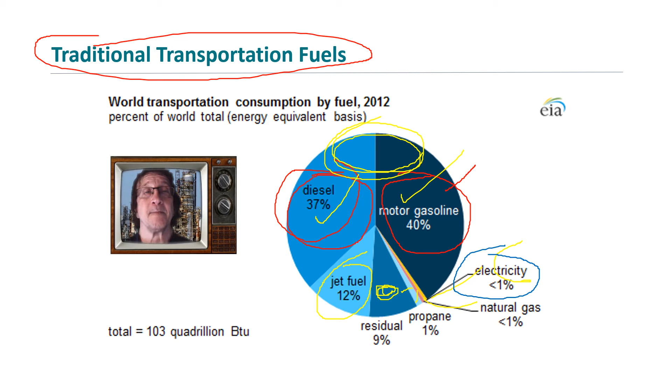Now, when we look at alternative transportation fuels, this is something we're going to see is probably going to be the best thing we can do to wean ourselves off of fossil fuels, is to look at more renewable types of fuels that we can make. The problem is there's going to be a consequence to that.

Right now, the most popular one is ethanol, because we could mix it with petroleum to dilute the petroleum and reduce that usage, so at least we don't deplete petroleum as fast as we do. We can make ethanol from a variety of plant sources and waste sources, but the thing is that then that competes with other sources for those plants and materials. Ethanol could be used in a lot of ways, for electrical production, again, to running vehicles.

We look at electricity as an alternate to petroleum, but again, this is going to be a small market, and this electricity can be solar, so we can make solar cars. But there's of course a downside to that, like any solar, in that you'd have to find a way to collect all this charge during the day and then produce enough power to move big vehicles, but also be able to have a reserve battery to run at night or when there's not enough sunlight.

Hydrogen, the problem is we don't find hydrogen naturally. It is a byproduct of certain industrial processes. We can make it, but it involves energy in itself, so there's an efficiency loss. And we can produce hydrogen-powered vehicles.

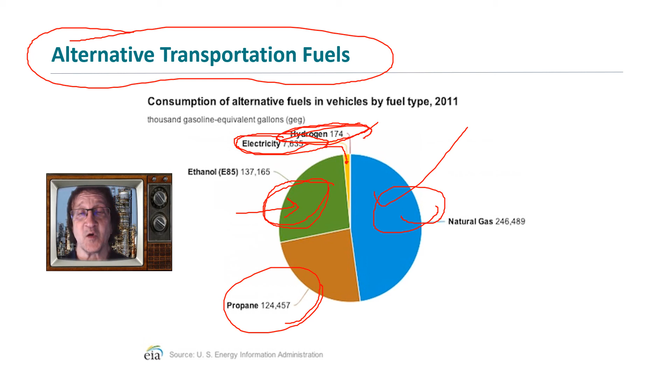for consumer purposes. But the problem is you have to have the raw materials and be able to make them at a rate faster than we use them, or else it wouldn't be considered a renewable. If we can't make it fast enough, it becomes non-renewable or difficult to renew, which makes it limited, meaning we have to conserve it, or it just gets very expensive.

So we look at the data for transportation, because this is a major energy glut, meaning a fossil fuel glut and other resource glut. It also uses a lot of resources in general, minerals and petroleum for plastics and other things.

But about 25% of our energy consumption in the United States goes towards transportation. This is not true of other countries that are still at earlier stages, like you learn in the Hans Rosling video, of foot or car, bicycle or animal transportation, or using small motorbikes. So we are big users, particularly of large vehicles and commercial transportation.

And 90% of this transportation uses petroleum, because, I hate to say this, but the cars outnumber the trucks. We use small trucks and cars very frequently.

What's really sad about this is that we still work in a mode in the United States like petrol is going to be there forever, and we don't look enough at cars that are very energy efficient. I mean it's much better than when I was a kid, a car would get horrible gas mileage compared to today. So we are looking at some options, but mostly we still treat petrol like it's always going to be there.

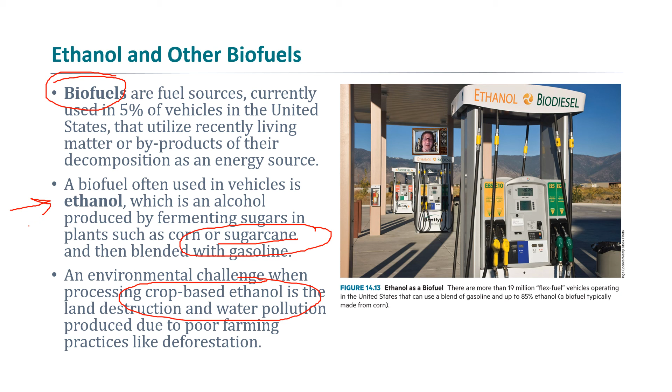And again, guys, we're still burning something. Remember, particularly for a test, we're still producing CO2, but these materials are cleaner and more controlled. That is a problem too, because crude oil naturally has additives in it that we design our engines for. So we have to redesign engines somewhat, and it does affect the powertrain in general and the output of the engines.

I am not a fan of electric cars. When I look at solar houses and other things like that, yes, but with a little hesitation. The electric car is not going to be the future for a while, and a lot of it is the power they can produce, regardless of what Tesla produces. There's still going to be some efficiency problems.

We're not talking about cars that can carry a big load yet, or trucks that can produce a lot of torque yet. This is being worked on, but the limitation is the batteries, and these batteries get costly and huge. When we look at a gas car, the battery is very tiny, but look at these electric cars, and most of the weight is the battery, and these batteries are toxic.

And they're difficult to recycle. In this country it's almost impossible to recycle them because they're considered hazardous waste. So we ship them to other countries with less strict environmental policies, and it pollutes those people. But it's cheaper to send them on a ship, let people, including kids, recycle the compounds in these batteries, and family-owned companies collect the materials and send them back to the United States where we rebuild these batteries. So the batteries have to be rebuilt, discarded and rebuilt, and hopefully somehow recycled without producing a toxic environment.

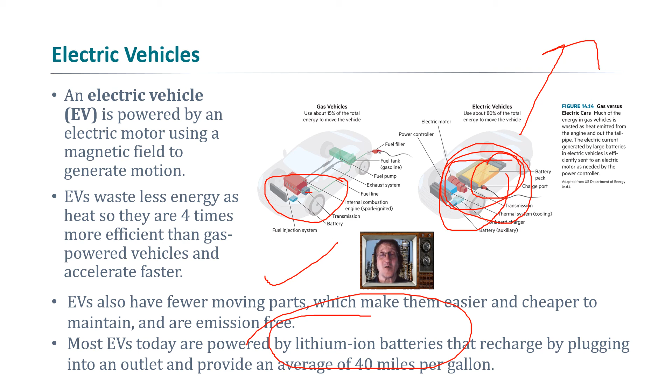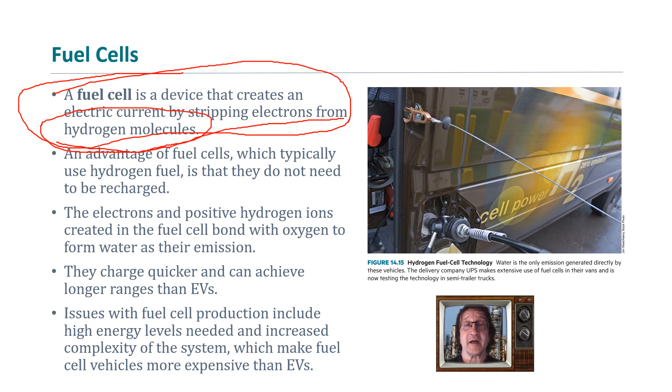Okay, fuel cells are a unique type of battery, in a way, or engine, if you want to look at it that way. These are based on hydrogen power. Like I told you, I met the guy that helped develop this technology. He was an engineer and also had his own consulting company doing this type of stuff.

These require a fuel, but it's a fuel you can make from water and other materials. What happens is the hydrogen is forced to bond with oxygen, and it creates water. So these buses produce steam. I've seen a couple of them in Germany and also in California, and they produce steam.

The problem is you have to have hydrogen refill centers, and hydrogen is a gas that has to be compressed, and it can become dangerous. It's also very explosive. I mean, the Hindenburg blimp dirigible was filled with hydrogen, and when it had a little spark, it exploded like crazy.

And we talk about also hydrogen can be used to make bombs. So hydrogen could be expensive to make, not safe to store and transport. Now on a bus, you're just filling up a tank, and it's probably no more deadly than gasoline in a tank, but it is more flammable, and we've got to be careful with this.

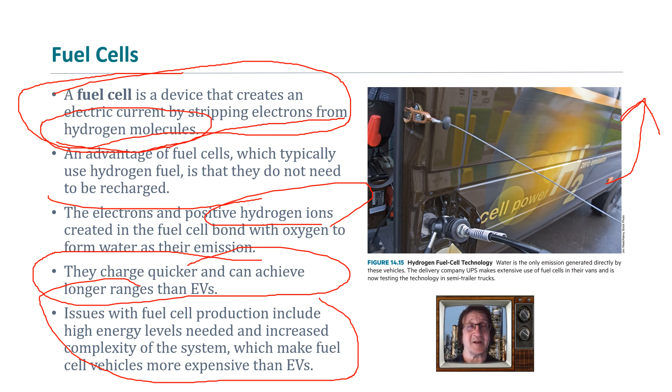But these produce water as a waste. The problem is now you have to recycle the water and use electricity to cook that water to make the stuff again. So you're getting an efficiency loss every time you recycle the water from a hydrogen bus, because you're losing energy and losing water in the process too. It's not 100% conversion. There's going to be some loss.

So guys, there are other alternatives to transportation technology. You can burn chicken poop, you can burn potato waste. There's all sorts of things you can put into cars as long as the engine can process it. We had wood burning cars at one time and steam cars that you could burn anything, including a darn mummy if you want to do that. That was actually thought to be done at one time, as people tried it.

So you can burn waste, whatever, as a fuel, but it could be a major polluter. It doesn't reduce carbon dioxide emissions, and it could also burn dirtier. But the thing is that it will wean us off of fossil fuels.

So many countries are looking at alternatives, and much of that is driven by the expense of petrol and diesel, because a lot of countries pay a premium price for their gas, and our gas here is like a quarter to an eighth of what some countries pay, and I've paid a lot for gas. I know, luckily the Bahamas didn't have many places to drive. When I did rent a car, it had like a 4-gallon gas tank that cost me 20-something American dollar equivalents to fill up. It was ridiculous.

So we're looking at, many countries are desperate. We're not there yet because of the cost of their gas. And they tend to build smaller cars. They tend to streamline transportation. They have much better transportation plans than we do at reducing traffic jams, which is the major way that we waste energy and stuff. You'll hear about that a little later.

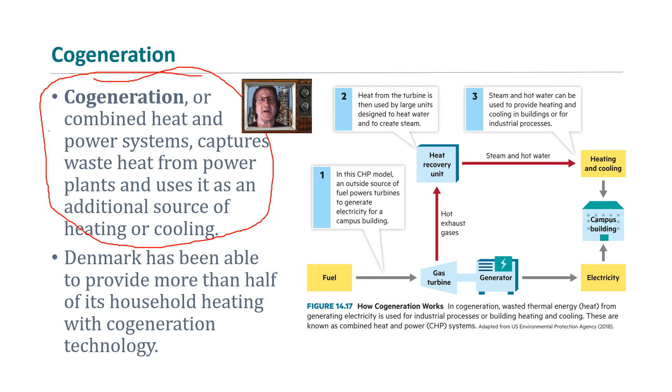And what's bad about it is when we are producing electricity, we are producing heat that is wasted. This is true in many facilities. So what we can do to our machinery overall, including automobiles, is try to trap heat that we produce with the running of power systems. And that even includes a power plant, anything, an office.

And if we can trap that waste heat, we could use it to co-generate electricity. That means use it to supplement power systems, very much like you hear about people with solar cells that pump electricity into the grid. So we could use our houses as ways of co-generating, either through generators themselves or some type of energy efficient device, or using some type of renewable energy to supplement.

This could also be dangerous because people that work on the power lines have to make sure that the circuit is really off, not only from the electrical company, but from any other people that pump electricity into that line. So if you're going to co-generate, you have to have a switch that when the power goes off, your power does not get transmitted through the line. So co-generation is being looked at in lots of ways of supplementing the typical traditional fossil fuel electrical generation.

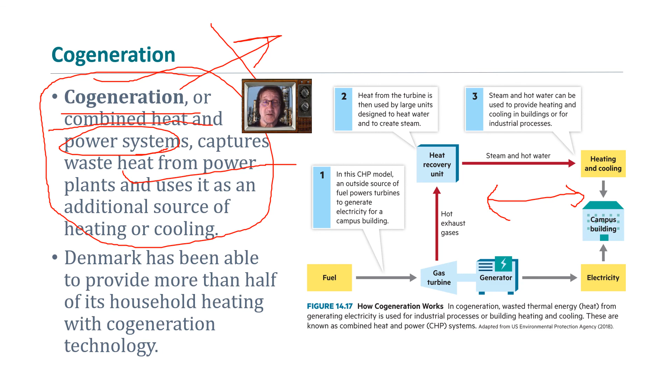Now, an interesting concept when we start using electricity, and this includes electric cars or anything, is we get an energy inefficiency that for some reason we sometimes call vampire power. That means it's power that's secretly sucked off and we never get to use it. It's the power consumed by the devices, lost to friction, lost to heat produced by friction, and other things. So anytime an engine runs, some of the fuel you're pouring into that machine is being lost due to the inefficiency of the machine and due to the effects of gravity and friction on any moving part.

I mean, we can't avoid it except maybe in outer space, but we can't run all our machinery in outer space under very cold environments either. We have to deal with the inefficiency of heat too. So this is a loss we're always going to deal with.

Also, when you have an appliance plugged in, that appliance is sometimes running computer chips, doing other things to keep circuits alive or batteries charged, or just keep circuitry going in general—that in itself gets sucked off. So when you leave devices plugged in, which a lot of companies tell you to do, it keeps the unit charged or running, the electronic devices or computers operating, or keeps the system warmed up, so when you turn it on or use it, it's always ready.

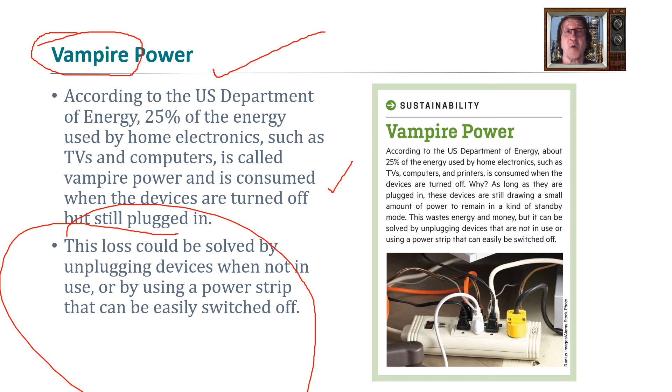Another thing you're going to hear more about in this class, bouncing back to transportation but also useful for electricity, is smart devices. When we use electrical machines, when we drive our cars, we are probably the most inefficient things operating stuff. If we were to allow artificial intelligence to take over machinery, jets, cars, trucks, a lot of jobs particularly in industry and manufacturing, AI could run things more effectively.

You're going to see a video on this going along with this lecture. This is an incredible thing to think about: self-driving cars. Of course these are out now, and we do have self-driving systems in general, some remote control, some autonomous, meaning they don't need a driver or someone sitting in a booth running these things. We find we can get incredible efficiency because we drive like maniacs, not just in Texas, but a lot of places.

So self-driving cars and self-operating machinery is going to be our future because it could streamline processing. And now we're coming out with smart circuitry that can detect when things are not being done efficiently and are wasting energy.

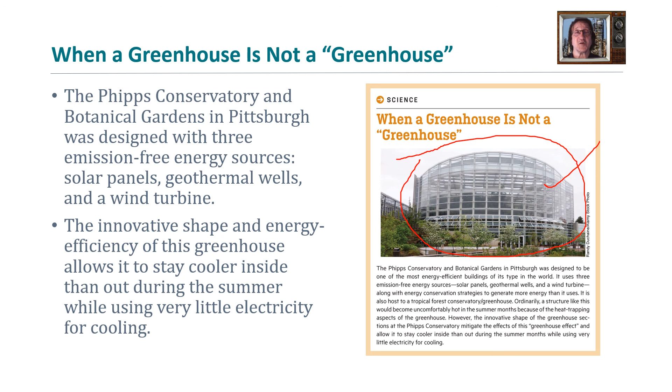So we are finding ways of turning what we call the greenhouse design of a house or building into something that could use the building shape itself to divert sunlight away from it, or help it lose less heat, or allow it to cool when it's warm out. This goes back to ancient technologies used particularly in the Middle East and in tropical countries, where houses were designed to let air flow through and to prevent sunlight from hitting directly or at a bad angle, so it causes temperature fluctuations.

So we could build buildings that are stable, that don't require as much air conditioning to cool, because the building is heating up from outdoor sunlight or from indoor bodies and electricity usage, since a lot of your appliances produce heat. We can make buildings that don't lose heat a lot, or vent the heat and control it. These are all ideas at reducing fossil fuel use, but not really replacing it.

In some areas, you could probably have houses with no air conditioning and heating. I know in New York, we didn't have air conditioning in the buildings. There were hot days—we considered hot like above 80; 70 was really hot, but above 80 was scorching. Yes, it was uncomfortable, but we had flow-through windows that made it a little less tricky. Now, of course, in climates like Houston, that gets unbearable with the prolonged heat. But there are ways of designing things to be a little more energy efficient.

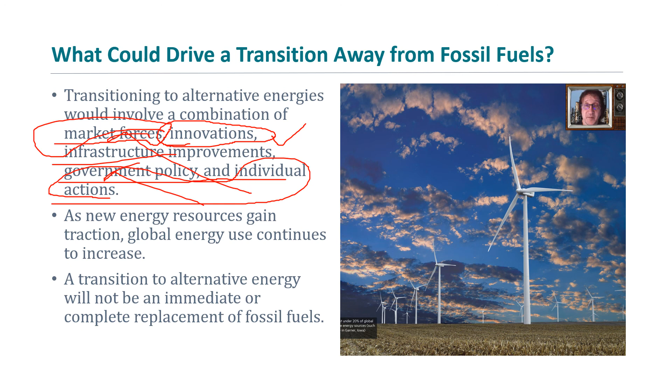We've been on fossil fuels for a long time, using the turbine type system of producing steam or using some type of direct heat to run machineries and to pump electricity. So in the time that I've been alive, I have seen this whole idea of economic forces affecting fossil fuel use for both electricity and transportation.

And we call these boom and bust cycles sometimes. So I've seen gas shortages a couple of times in this country, sometimes in other countries. I've seen the price of gasoline drop and go up incredibly.

At one time in New York in the 70s, I could not afford to fill my parents' company van. It had a 40-gallon gas tank. It was a work truck. We also had a station wagon that had a big gas tank, and we couldn't afford to fill it sometimes.

We also couldn't even get the gas. There were shortages. So we'd have to use public transportation to move small materials back and forth, or else pay somebody to do it, which was probably more than it would have cost for us to do it. So these are natural cycles.

And we see the automobile industry sometimes responds to this by making cars that are more energy efficient or less, so we're used to seeing fluctuations. And I remember watching gas go from 25 cents a gallon to $1, which now we look at $1 as cheap.

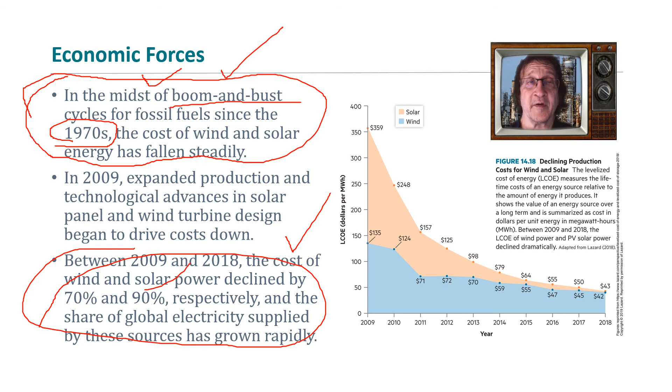And again, this is going to be a boom and bust, meaning we're going to see one group favored over the other over long periods of time. So guys, when we look at generating electricity, this is a problem because we have to be able to not only make electricity, we have to be able to store it and distribute it based on need and usage.

Probably the biggest driving force that's going to permit wind energy and solar energy to produce more than 25% of the energy that we're using now, which is actually pretty good—a few years ago that number wasn't that big—is we really start looking at local approaches to producing electricity rather than regional or national.

So we're going to have to look at more smaller industries that are providing local electricity, which is probably better because New York can't operate the same way as St. Louis, and St. Louis can't operate the way as some small town in Kansas, like Emporia, Kansas.

So when we look at local distribution, this is the only way we're going to see an increase in wind and solar, and maybe look at water, or wean away from coal for larger cities, because once we wean away from coal, we could use alternatives and it would be cheaper than large electrical production.

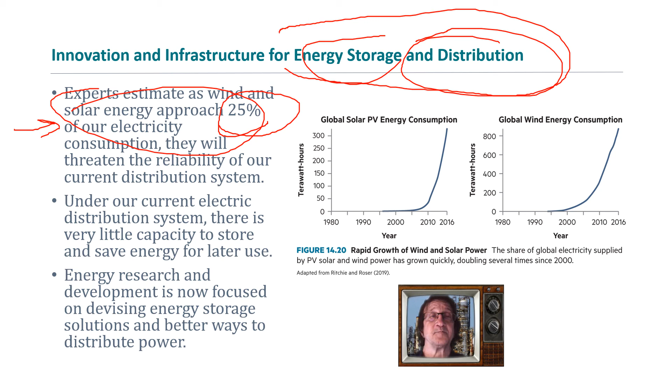So mostly we're going to see a transition in rural areas that's going to go with alternatives to coal and fuel burning to make electricity. But the larger production will probably be stagnant, and we're probably not going to see many what I call green options—that means wind, water, whatever—for producing this energy. So there are many creative ways, again, of producing electricity.

We have water power, hydropower, which I didn't mention in the previous slide, but because this is very regionalized, you still need a lot, you still can produce large amounts. For example, the Boulder Dam electrical plant in Nevada produces a lot of electricity for Los Angeles, which is a pretty good distance away. But not every place could have this kind of water.

Plus you have to build artificial structures to retain a body of water powerful enough to flow through a dam, like a waterfall. Literally like in Niagara Falls, which I visited a couple of times, you're using a natural waterfall, but that waterfall varies in volume. And also by tapping into the waterfall, you're affecting the environment. And these turbines also wear out.

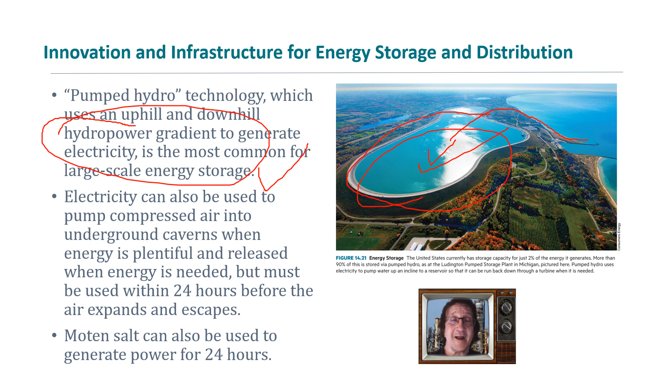So again, when we look at alternatives, they're probably going to be local, because you can't produce hydro in areas that don't have water or not near the volumes of water that we can produce electricity with.

So there's all sorts of strategies for producing electricity. But the thing is, what we need to do when we produce electricity is find better ways of storing it. That means we're going to pump it, use it, and then keep pumping and storing that energy for later times. And we can also do what we call modulate.

At least in our area, there are peak times for electricity and there are low times, and that is not easy for power companies to keep up with. If we can produce electricity at a stable amount, during those low times we produce more electricity than we need, during the peak we produce less, but excess is stored in batteries. Power plants can run more efficiently and smoothly, and we sometimes won't have a usage crash where we tap into electricity faster than it can be produced. It shuts down the systems, and we sometimes have to cut off electricity to various places.

Our college participates in a plan where we will allow our electricity to be cut off so that housing and emergency areas like hospitals and businesses could have electricity, because we're more adaptable than they are at times. Just hold class outside or whatever, deal with no internet for a while. Unfortunately, no flushing toilets either for most of our toilets.

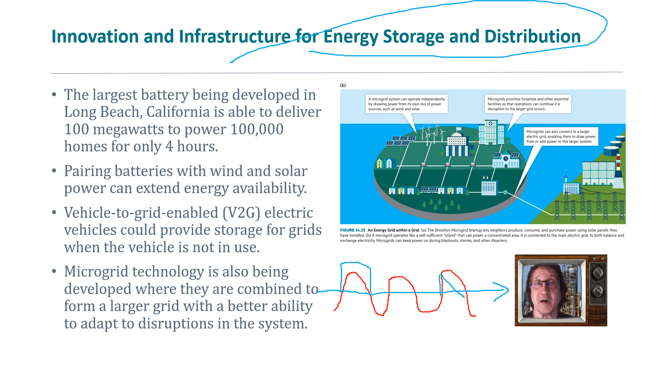I'm happy to say in the past 5 years, there have been many governmental actions that are supporting research and becoming models for how government should set the pace for encouraging alternatives or reducing our use of fuel for electricity and for transportation. You go to places like California, parts of Kansas, New York, there are all sorts of, right now, sometimes unpopular regulations and laws and programs being set up to reduce energy because it helps everybody. And also we're finding out that it does save money.

Now there's an initial cost to it. Like I know in New York, there's a plan to get rid of all gas-powered taxis. And guys, the people that drive taxis, they pay a lot for that thing, and they sometimes run marginal businesses. They don't make a lot of money a lot of times. I've driven them for a while to get through college. So you have to provide subsidies for the taxi drivers to transition their cars, to trade in their cars or get a discount on buying an electric car.

And sometimes we use traffic control too to reduce standstill traffic. So we tell taxi drivers, you can't go down this street when there's a jam and you have to find another way to get around. Or we pace taxis at certain times to avoid the jams, which is difficult on people trying to use those ride shares. So there's all sorts of policies out there that, again, are useful.

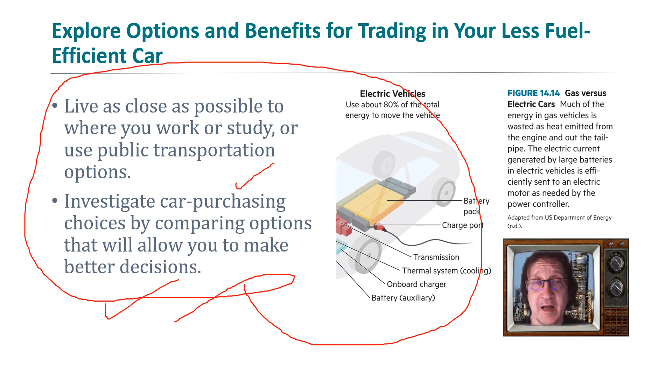Sometimes that means we're going to have to supplement them, but by sheer volume and numbers, their use of petroleum products is a major pollutant. We looked at this earlier in the semester, that just the sheer number of people outnumbering us, even though they use less technology, they're using older technologies and will be using those technologies in the future that produce a lot of pollution and greenhouse gas.

Just a little end note, your book focuses a lot on education and using college and university students as a way of getting you guys to look at making the world sustainable for your own good, not because I think it's good or it's a socialist way of looking at things. It's a way that you have to think about your future.

So we would host competitions, a lot of colleges do, to make their campuses energy efficient, everything from dorms to buildings, and our buildings are energy efficient and also water efficient. We recycle a lot thanks to environmental science students in the past who met with the college presidents and building engineers, and proposed programs to reduce electricity use, do more recycling, reduce the use of disposable bottles, and make buildings in general more energy efficient. This is incredible. We also worked with the cafeteria to produce less waste or find a way of recycling the cafeteria waste. So we have positive ways of doing this that can be somewhat competitive.

So on that note, just think about how you can promote change and how your everyday life affects the way we use electricity and transportation now. And I'm guilty of not being the best person at minimizing my own environmental footprint. I'm slowly working at minimizing it, but I'm used to a certain way of doing things that are very difficult to abandon.